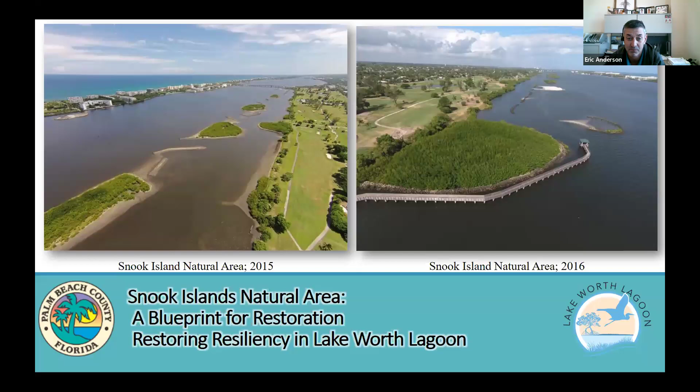Today, Carrie asked me to speak a little bit about Snook Islands. This really wasn't the beginning for Palm Beach County and a restoration story, but it really has provided us the blueprint for the past 20 years of what we learned at Snook Islands. And I'm going to take some of those lessons that we've learned at Snook and share, and hopefully you guys can envision some of these types of projects in your area.

One story that I really want to just start with, and I wish I had more time to talk about, is the Lake Worth Lagoon American oystercatcher. Their story really began in 2005 upon the completion of Snook Islands. The contractor said, "We see these birds with these big yellow or orange beaks hanging around. We're not sure what's happening." They were attempting to nest the very first year Snook Islands was completed.

The project wasn't designed for coastal bird habitat, but these birds showed us that we provided them habitat with the food, shallow habitat, and their story continues through this day. We have 4 nesting pairs of these birds nesting on Lake Worth Lagoon restoration projects. And as I said, they're continuing through this day.

We have an ongoing restoration project. We got about 20 American oystercatchers all hanging out on newly created sand. The project hasn't even completed yet. 13 of those were banded. While most of them were banded in Lake Worth Lagoon, there were 2 birds, one banded from Martin County and another one banded from Brevard County. Just shows you how restoration is so important for all of us.

Not only did they have American oystercatchers, but we had black skimmers. There were about 19 to 20 black skimmers. We had 4 of them with bands, one from an undetermined location in Florida, 2 from North Carolina that were just banded this past summer, and 1 Royal Tern from Virginia banded in 2019. So we're all connected by water, we're all connected by habitat, and it's just so important that we create this habitat.

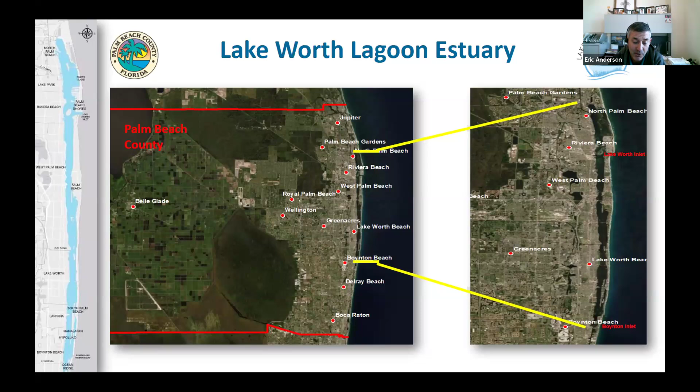The North Inlet of Lake Worth is really our primary focus of where we get most of our oceanic water to create the estuarine system. We do have Lake Okeechobee in our northwest corner. While we do not get a lot of Lake Okeechobee water in Palm Beach County, that mostly goes north to St. Lucie and west to the Caloosahatchee area.

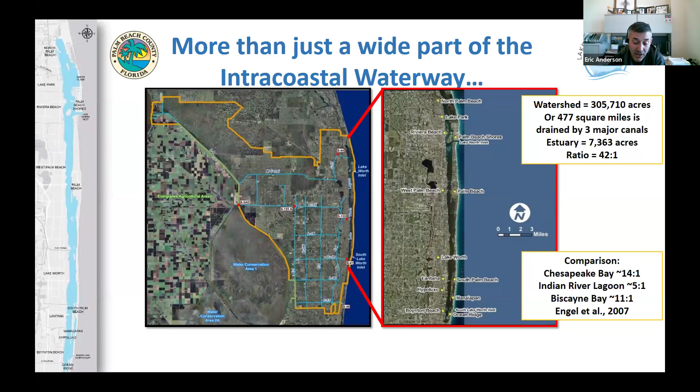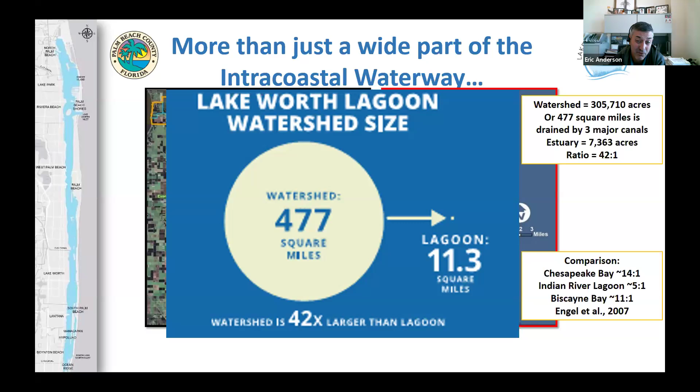We do have a huge watershed, over 477 square miles. As you know, what we do really good in Florida is we move water and drain water. And so while we don't get a lot of Lake Okeechobee water, our own watershed produces quite enough water, or more water than we even need. And if you compare that to other estuaries, Chesapeake Bay only has a 14-to-1, Indian River Lagoon 5-to-1, Biscayne Bay has 11-to-1, Lake Worth Lagoon has a 42-to-1 ratio. So our own watershed is creating some of our own challenges.

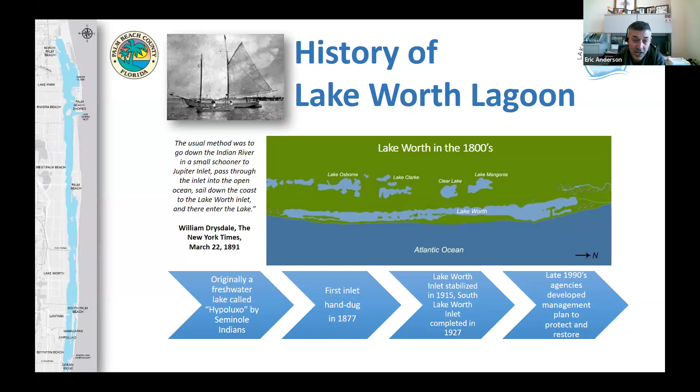It really wasn't until the 1990s, which is only 30 years ago, that the first management plans to protect Lake Worth Lagoon were really in place. So this restoration business is relatively new in protecting our waterways. We've had over 100 years of influences, just like most areas in Florida, whether it's marinas, seawalls being put up, stormwater discharges, freshwater discharges.

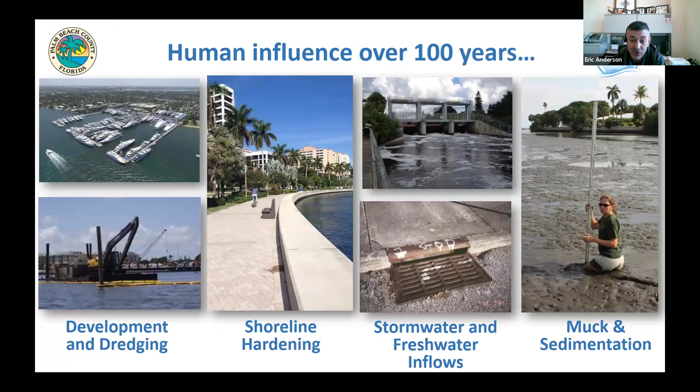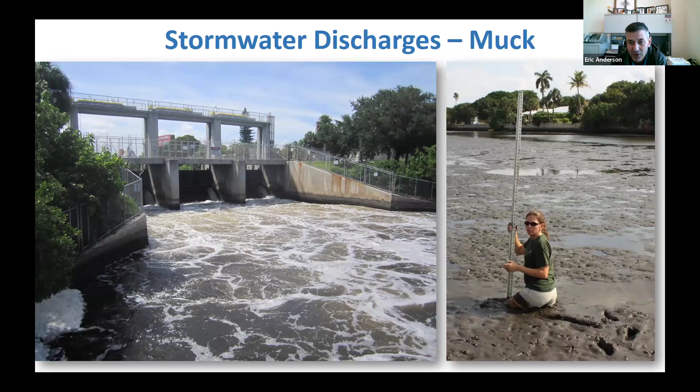So our goal has been to try to find a way to cap these muds, create habitat, and improve habitat. Just one example, all the sediment that comes with the discharges on your left here. This is one location where we did a restoration project and capped that mud. Not every location has muck that's exposed at low tide. A lot of it's in those deep dredge holes. Our area has about 70% that is hardened shoreline. That only leaves 30% natural. So we do have a lot of areas to work.

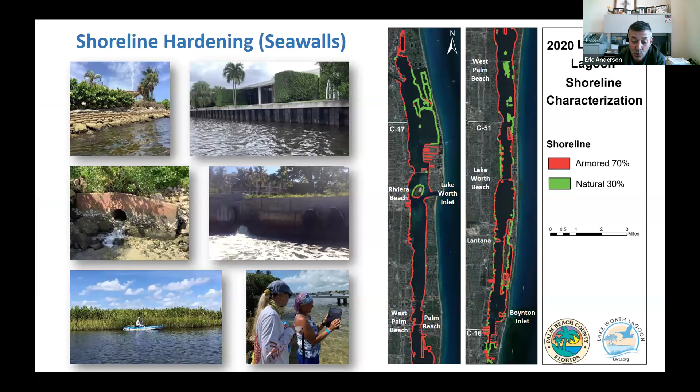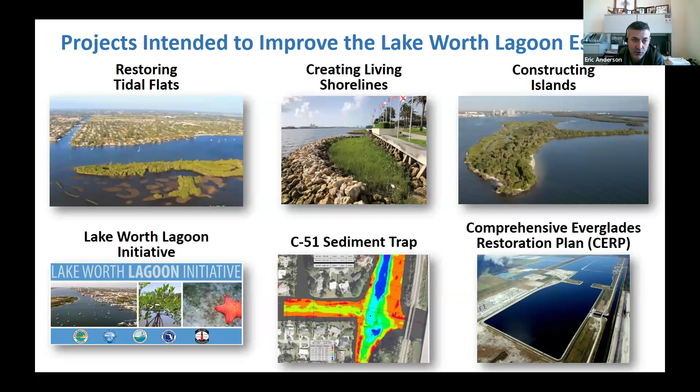We have a series of tools that we utilize. Down on the bottom, we have a Lake Worth Lagoon Initiative that helps get funding, brings partners together, has meetings like you guys are hosting today. In the early 2000s, we did a sediment trap project where we dredged sediment from the C-51 before it got into the lagoon. And while Lake Worth Lagoon has been taken off the CERP Everglades, water storage is always helpful for everybody, whether it's Lake Worth Lagoon or the West Coast or the northern estuaries. Today, I'm going to primarily focus on the restoration tools that we used to create habitat, create living shorelines, and restore islands.

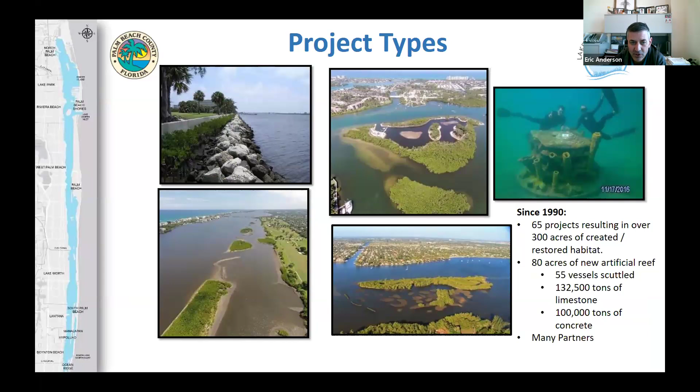The series of tools that we've developed is putting rock in front of seawalls, scraping down islands, an artificial reef program, creating breakwaters and oyster habitat. And what I'm going to focus on primarily is building islands. I always like to start with this slide because you do need to find out your past before you move forward. Palm Beach County's history really started in the 1990s with Munyon Island. We actually reached out to Miami-Dade County. They were doing a lot of these island restoration works. Gary Milano at the time was our inspiration and helped us get into this business.

But it wasn't until we partnered with the Army Corps of Engineers and the state of Florida to construct Munyon Island to create wetlands, removing spoil from this area. This area used to be, in the 40s, a location for the rich and elite to come and drink the pawpaw elixir, which was considered the fountain of youth. While we found some empty bottles, we never drank it. Munyon Island is our fountain of youth, and we realized restoration is an important area for us. Taking those tools, we've done a series of other islands: Munyon, Johns Island, Fullerton, most recently Sawfish, utilizing those same tools, scraping down islands and creating habitat.

Upon completion of Munyon Island, we partnered with the Army Corps of Engineers again to develop Peanut Island not only as a county park, but also as a dredge material management site. The Florida Inland Navigation District and the Army Corps were looking at a place to store additional material. However, they needed to take off the material from Peanut Island, about 1.2 million cubic yards.

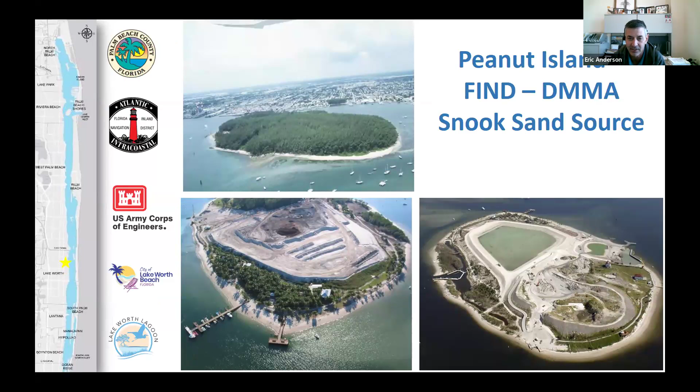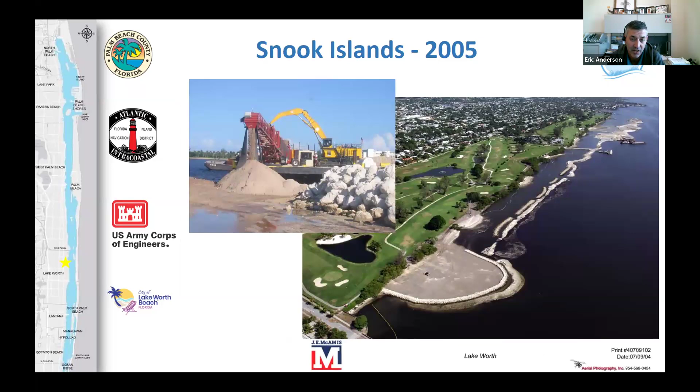Finding a location to take this material, we identified the Lake Worth Golf Course, which is now called Snook Islands. It was an eroding seawall and a deep dredge hole over 20 feet deep with 10 to 15 feet of mud in some areas. The project brought in 1.2 million cubic yards of sand to fill in those muds, cap that mud, and create a true nature-based solution for this shoreline. Rock was implemented to create breakwaters, to reduce wave energy, and to protect the mangroves.

So the tools that we learned from Snook Islands are really a lot of the tools that we've been able to take. And while Snook Islands was almost a 100-acre restoration site, a lot of the lessons learned of breakwaters, of making these mangrove islands, is what we've been able to take on and build the rest of our restoration projects.

One interesting thing about Snook Islands is when we originally constructed, we constructed a lot of areas with open spaces. As you can see now, those open spaces have closed in and mangroves have grown up. So we do have to do some management activities to keep those open spaces open by removing mangroves and vegetation coming in, to allow visitors to actually see what we've created. So top left-hand corner, you can see the failing seawall, bring in sand, plant Spartina, a couple years of Spartina, and now a lot of that Spartina has been outcompeted by mangroves.

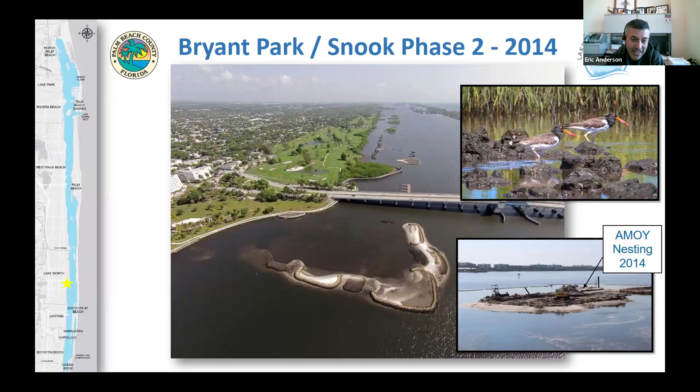In 2014, we partnered with Florida Inland Navigation District and the state of Florida's DOT to construct seagrass mitigation for building bridges. And this was the second phase of Snook Islands, building smaller mangrove islands and oyster reefs. This was the first project where, while we were bringing sand, our second pair of American oystercatchers nested on the sand during construction. And so it made us start thinking, it can't just be about oysters. It can't just be about mangroves. We need to consider the birds.

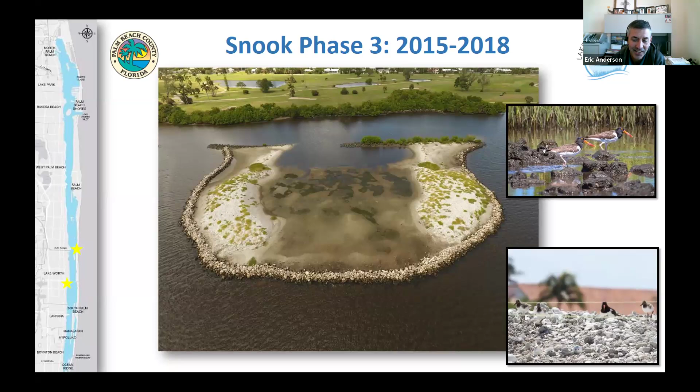The third phase of Snook Islands included receiving materials of opportunity, beneficial reuse from local marine projects, dredging projects. And we created 2 nesting bird mounds and a mangrove island in between. This was our third pair of birds nesting in Lake Worth Lagoon as a result of this. We were hoping that the 2 mounds would allow 2 different pairs to nest. Unfortunately, these birds are solitary nesters and they've taken up the whole island.

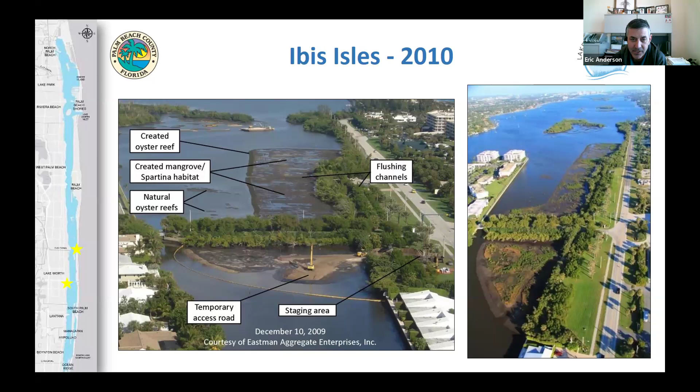Ibis Isles is a location where, remember the girl was in the mud earlier. This was shallow water mucky habitat that we wanted to cap, and we did cap to create mangrove, Spartina, and oyster habitat. South Cove in 2012, filling in a deep dredge hole. Grassy Flats, utilizing the same technology that we used at Ibis, we used a sand shooter, which broadcasted sand over shallow water mucky conditions to create about 12 acres of seagrass habitat and 2 acres of mangrove. And this was our first project that was specifically designed for American oystercatchers to nest.

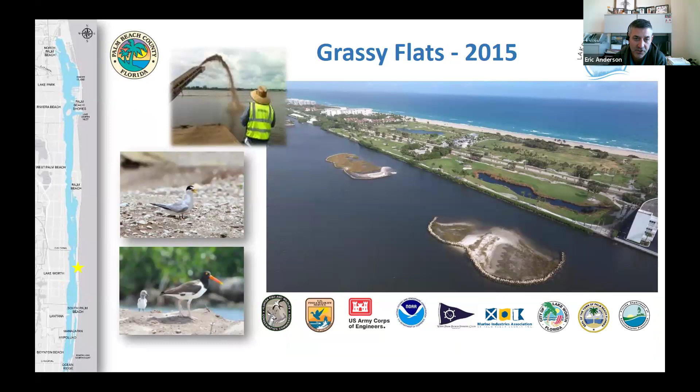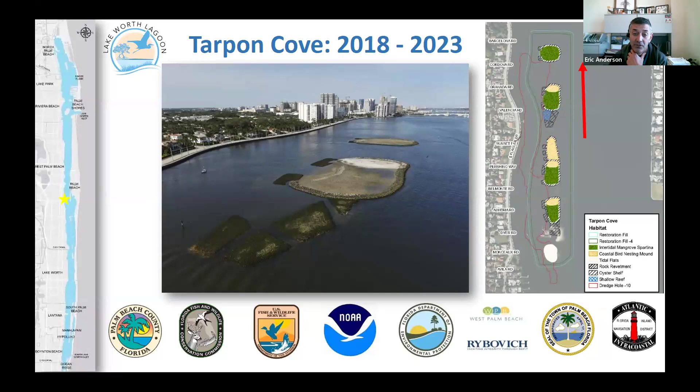Most recently, we just completed Tarpon Cove in downtown West Palm Beach. This project required over 500,000 cubic yards of material. Of that, 369,000 was beneficial reuse at no cost to the county. Not only did American oystercatchers nest on this island during construction, we also had 3 years of black skimmers nesting and 2 years of least terns nesting.

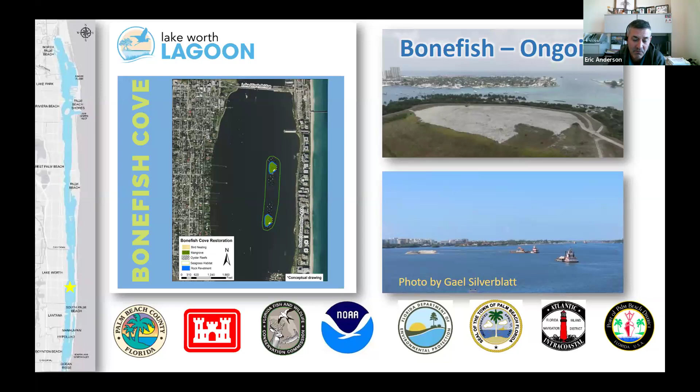I know we're getting close to time here, so I'm just going to run through a couple of the last projects. Our most recent project is Bonefish. I showed you earlier with all those birds utilizing it, similar to Snook Islands and similar to Tarpon, filling in a deep dredge hole to create intertidal habitat.

One lesson that I do want to share, though, is some of these dredge projects do require lots of material. And material can be the challenge for these projects. You need to have a sand source, and the county's done that either through partnering with Florida Inland Navigation District or local marinas. If you can find shallow water locations that do not have resources, those are also bang for your buck.

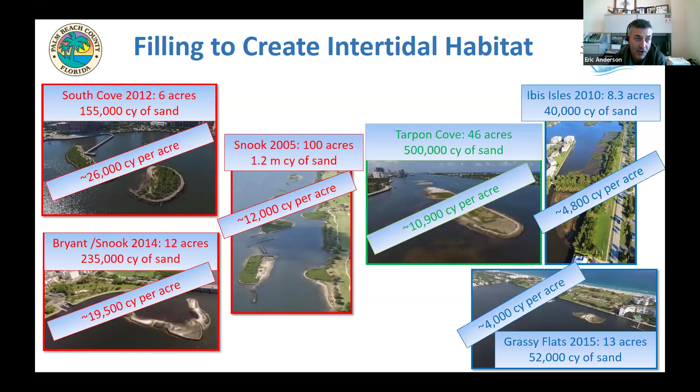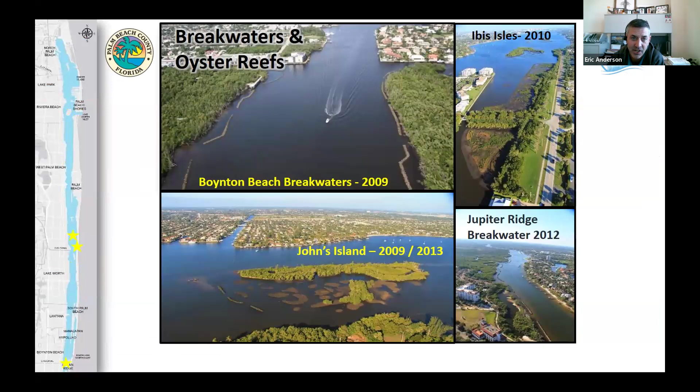So some of the tools that we've used in the toolbox is breakwaters, and I know Thomas and Jenna both talked about these. We have those at Peanut Island. John's Island rock has been great for oyster habitat for us. Breakwaters in front of existing mangroves that have heavy wave energy, Jupiter Ridge and Boynton Beach. John's Island is one of the reasons why we've had such successful American oystercatchers utilizing it. The rock that we've put out there has created amazing oyster habitat.

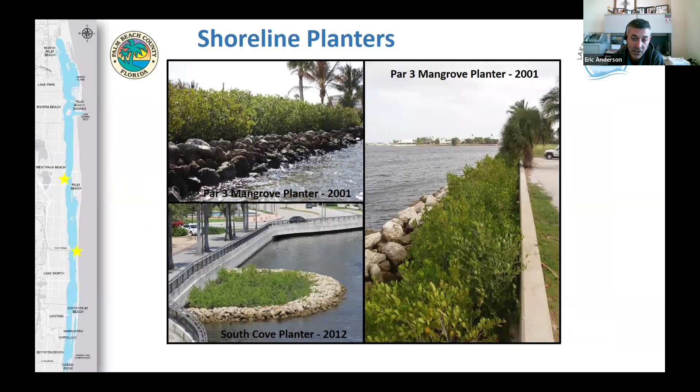Highland Beach and Old Bridge Park, again, just breakwaters in front of existing areas. Our shoreline planters, putting rock in front of a seawall. Par 3 golf course has not had to have a seawall replaced in 20 years as a result of just adding mangroves and rock. Over the years, we've dabbled with concrete culverts at Lantana. We've dabbled with artistic prefab structures at Bryant Park. And then just our more typical rock riprap.

And all of our projects we plant with Spartina and mangroves. You can see the Spartina lasts for the first couple years, and then eventually the mangroves will outcompete the Spartina to create a green-gray living shoreline.

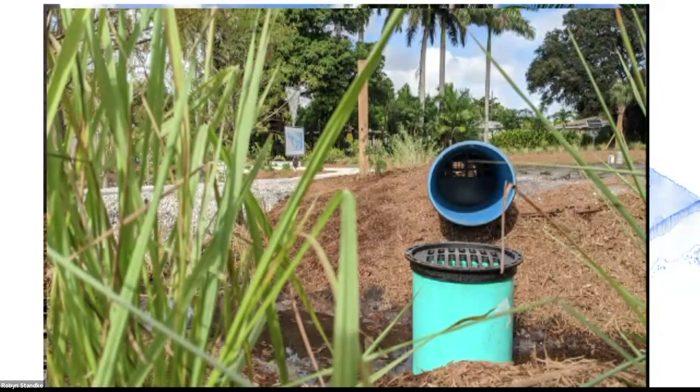The intent of the design, as I said, was to make the invisible visible. So you'll see that this big blue pipe that's normally stuck underground, we wanted it visible. We wanted to utilize a low-tech, solar-driven, above-ground pumping system. And you can see that here, so that when the water rises to the top of that conveyance, that pump device that you see right here, it will automatically pump when this bioswale is full. It will automatically pump it up through the stormwater pipe down into the pond. Next slide, please.

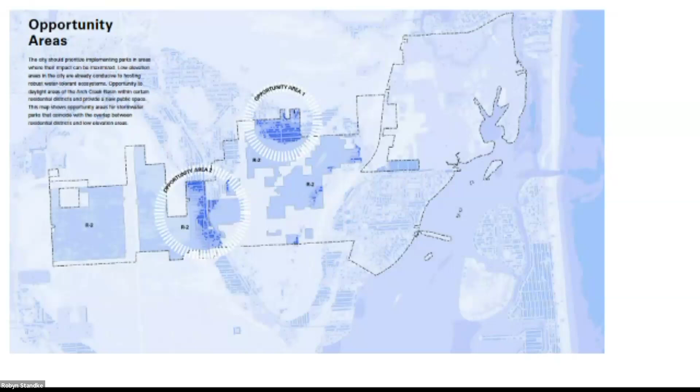So expanding this network of open spaces, we wanted the parks to both increase the, how do I say it, the absorbency, have more native trees and plants back in the urban areas and protect our groundwater. The third thing that we wanted to do was raise environmental awareness and promote community engagement. And the final thing about these stormwater parks we want to share with other jurisdictions and agencies is that it's really easy to do. These are very, very simple.

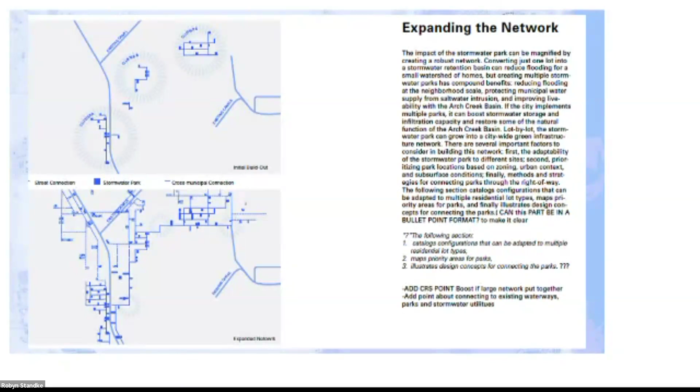It required being first out of the gate, and unfortunately first out of the gate oftentimes means that you are struggling and trying to get people to recognize the importance of this. The other thing I wanted to share with you is it's really important to have that education component and to deal with engineers in the public works who want to do a typical retention pond. Next slide, please. I'm almost finished here. As you can see, the plan has various types of network and lot typologies. Go ahead, next slide.

So the funding sources, remember I told you we definitely have budget issues. So we had the primary grant. We got a grant from FDEP. Thank you again for that. Nature Conservancy donated a lot of our plants. We had private donations, and the county actually waived its planning review fee. Next slide.

We really are excited to share this project with others. We've had other agencies and jurisdictions tour the park to learn how it works and the easy replicability and scalability of this type of community green infrastructure. And we did receive an APA award of excellence in sustainability. Next slide. I'm going to give you just a couple of takeaways.

First out of the gate is innovative ideas are hard to move forward. It can be frustrating, but don't give up. Remember, I said education. Have not just a staff champion your projects, but also the decision maker. Get your city manager, council members. Do a really robust community engagement. Don't forget to bring in the external agencies and be creative with your funding sources.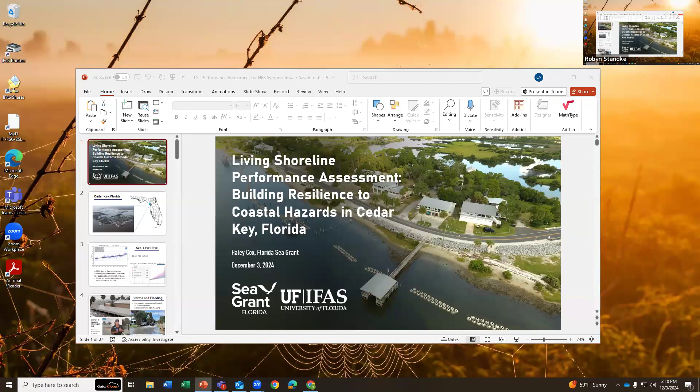Oh, hold on just a second. Are you able to share your? Oh, there we go. Let's see. We might need to switch to. Let me switch the screen around. Honestly, if people can see your notes, it's not the worst thing in the world. All right. This is my battle station. I have like 3 monitors and I never know where we're going. Perfect. Okay, we can see your slides now.

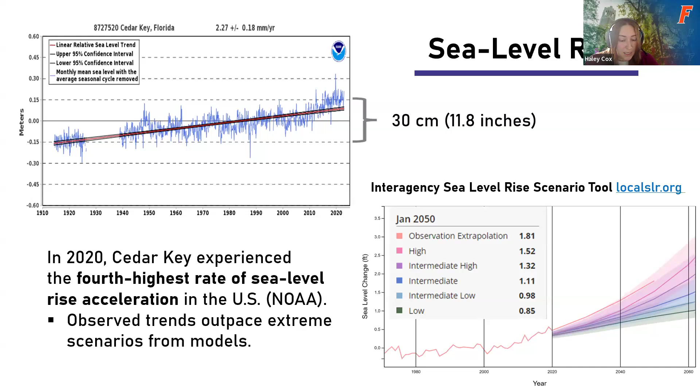According to NOAA tide gauges, Cedar Key is experiencing one of the highest rates of sea level rise acceleration in the country. Sea level in Cedar Key has risen about a foot in the last century, but over half of that rise has occurred just in the last 20 years. Extrapolation of these observed trends outpaces even the most extreme modeled predictions for future sea level rise. Coupled with changing rainfall patterns, this leaves a community really vulnerable to the effects of compound flooding, especially when rainfall events coincide with daily high tides.

Since Idalia, we've had 2 more hurricanes landfall in the Big Bend. We had Debby in August of 2024 and Helene just at the end of September. During Helene, Cedar Key experienced a surge of over 10 feet, and the community is very much still recovering from what was a really devastating impact.

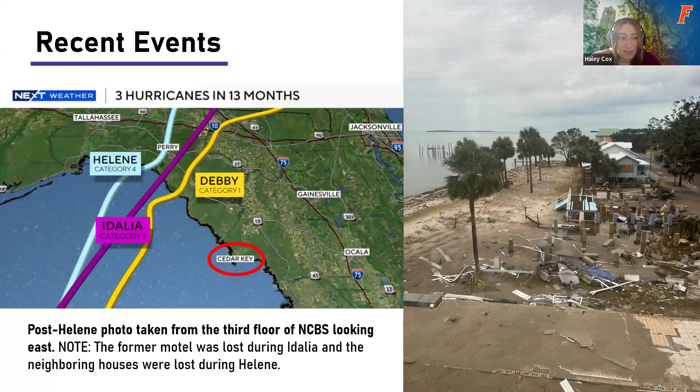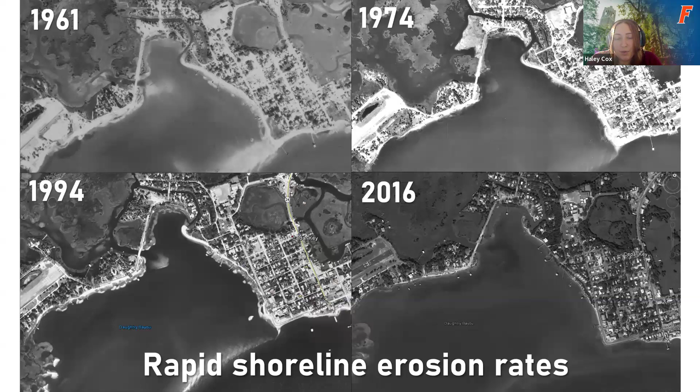So this compound threat of sea level rise, coastal flooding, and then these storm impacts, it also contributes to the rapid shoreline retreat that we've observed in Cedar Key over the last 50 to 60 years. And this is an area called Daughtry Bayou. These aerial images document this really noticeable shift from sandy beaches with vegetated dunes to skinny shorelines that now abut road infrastructure and residential property.

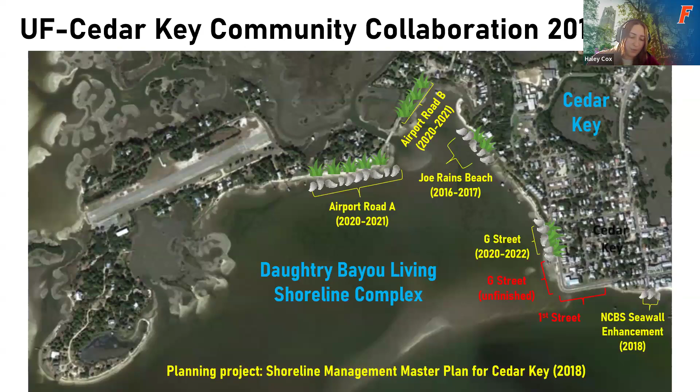And shoreline management practices in Daughtry Bayou and elsewhere in Cedar Key now utilize nature-based solutions in the form of living shoreline construction. So I don't need to extol the benefits of living shorelines, but they do provide a variety of ecosystem services. And I'm going to be focusing on 2 of the benefits that have been the most impactful in Cedar Key. And the projects that I'll be referencing were designed with the goal of reducing incoming wave energy and erosion in order to protect existing infrastructure, such as major roadways.

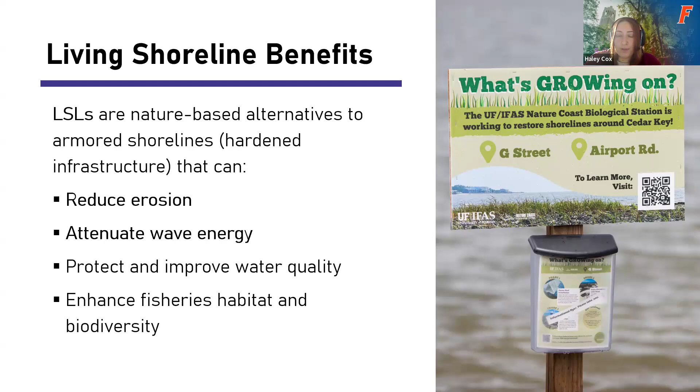So all of these projects that I'll mention, they're essentially retrofit designs that were installed along shorelines that had some form of existing armoring. The funding sources for the Daughtry Bayou Living Shoreline projects include federal and state funds from the US EPA, FDEP, as well as FWC. So I'm going to move us through this section quickly so that we can really talk hurricane impacts, but I would be happy to provide additional resources that go into more detail about the design and construction of these projects.

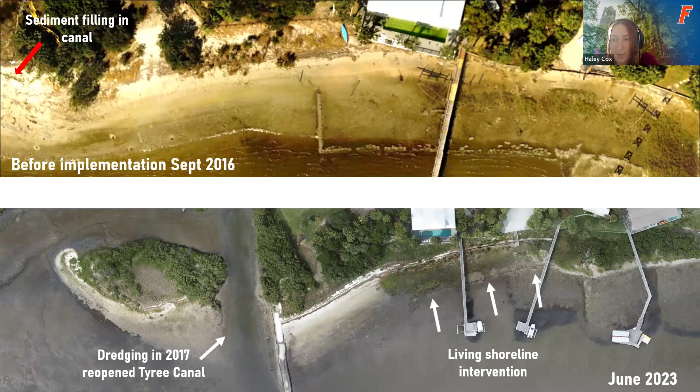Since implementation, the previously failing bulkhead that is in front of the homes pictured here, it has remained intact throughout numerous storm impacts over the years, and the vegetation had plenty of time to establish. It hasn't been significantly impacted either. We have seen a bit of a shift in the community composition, though, as mangroves have started to naturally recruit along the shoreline.

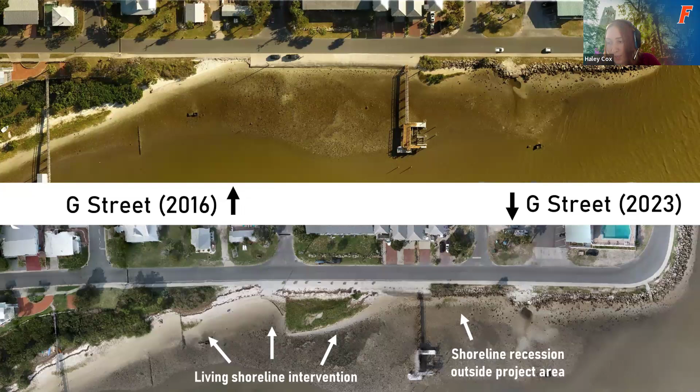So speaking of green, prior to Hurricane Idalia, the extent of the vegetation cover at the Airport Road and G Street shorelines had been increasing since implementation. However, coverage has decreased a bit after these repeated storm impacts, primarily in the higher elevation zones at Airport Road.

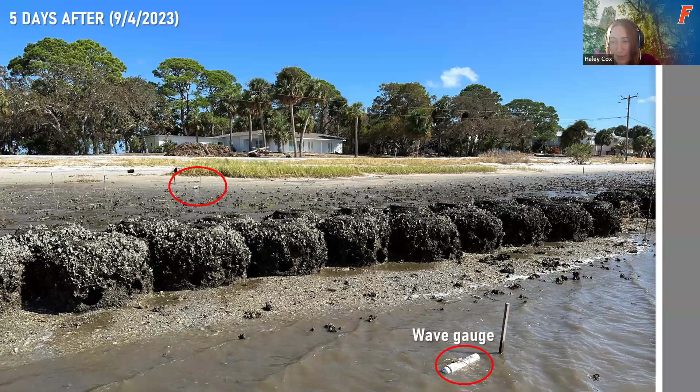So on to the good stuff, wave attenuation. Ahead of Hurricane Idalia, Mark Clark in the Soil, Water, and Ecosystem Sciences Department at UF was able to deploy 23 wave gauges along Airport Road and G Street. The deployment sites also included areas outside the project zone, so we would have a hardened reference point available to us. In this picture, you get a better idea of the placement, and you can see what the exposed reef balls look like at low tide. So we have an inshore gauge and an offshore gauge that was placed outside of the influence of any of the breakwaters.

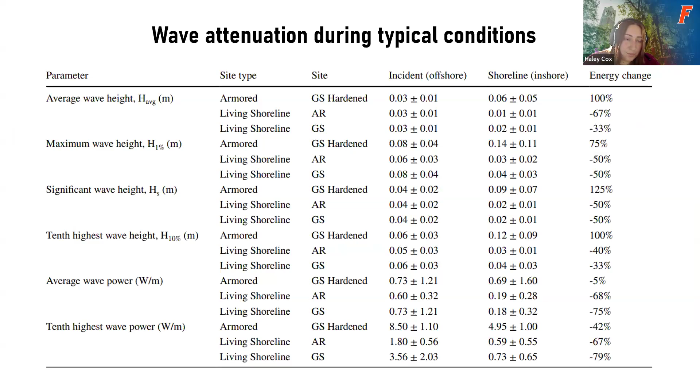This table shows the incident and shoreline wave climate and attenuation during conditions leading up to Hurricane Idalia as recorded by those offshore and inshore gauges. During typical conditions, wave energy reduction in the living shoreline zones ranged from about 33 to 79%. Then this table shows values recorded during the storm, and the living shorelines reduced wave energy by up to 28% in certain areas along G Street.

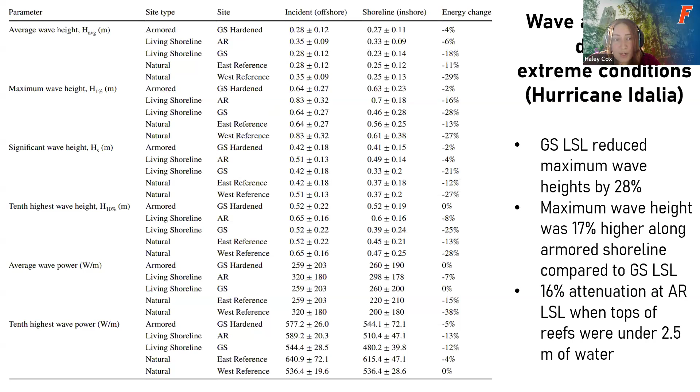There are a few other things to note that aren't captured in this table, but the maximum wave height along the armored shoreline was 17% higher compared to the G Street living shoreline. We also see some interesting data here with wave attenuation expressed as the percentage reduction in incoming wave energy, measured across different water depths.

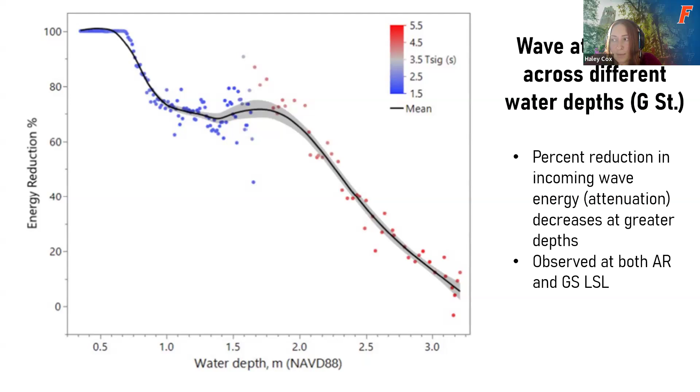The black line represents the mean energy reduction values. The gray shading is the confidence of fit. And the color of the points represents the average significant wave period. So those warmer colors are longer wave periods. These are taller waves, the water's deeper. So the percent reduction in incoming wave energy does decrease at greater depths. Go figure.

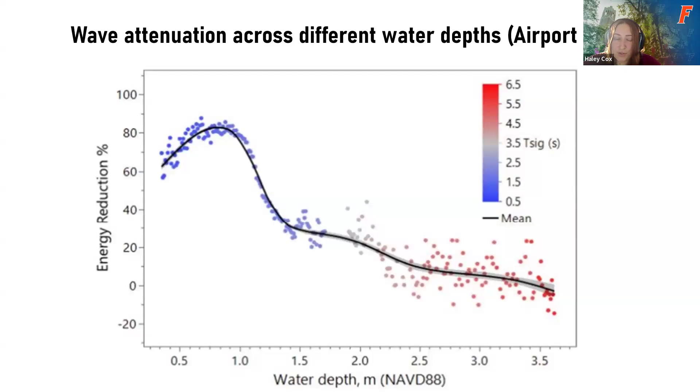But something that's interesting, this is along Airport Road, we did notice that wave energy was still being reduced by up to 16%, even when the tops of those reef structures were under about 2.5 meters of water, which was surprising to see.

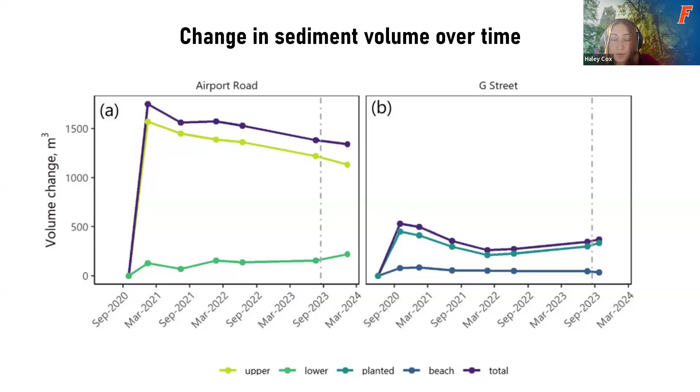So examining only the lower intertidal zones, the volume change trends were positive or at least stable at all sites, indicating that erosion has been halted and accretion may even be occurring in some cases.

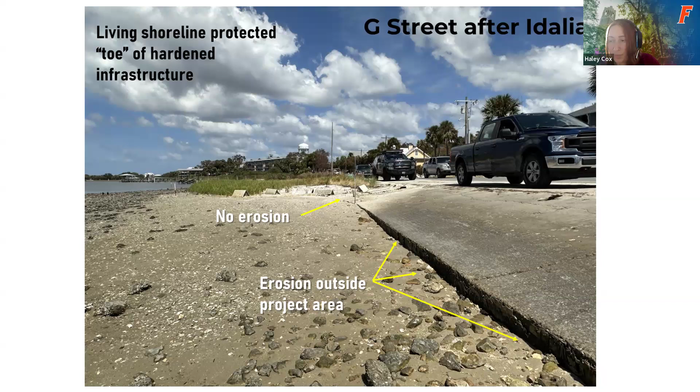I think this picture tells an interesting story and also highlights how these shorelines are protecting hardened infrastructure behind them, which is particularly vulnerable at the toe or the base of something like this concrete apron. This is that same section of G Street after Hurricane Idalia, and we're still noticing the same phenomenon where the area outside the project footprint is still experiencing the effects of ongoing erosion.

So overall, I think we've had great success building ties to the Cedar Key community. And these projects have really opened the door for discussions about nature-based solutions, even different types of nature-based solutions. We're working on some projects that are more focused on stormwater now. So great to see that.

All of the shorelines have weathered multiple storms now with minimal losses of sediment and vegetation, and they have successfully sheltered the infrastructure behind them, which was the goal. So we came away with some of this data that suggests that these types of shoreline interventions do provide some level of protection during extreme events, in addition to typical conditions, which again, love to see that.

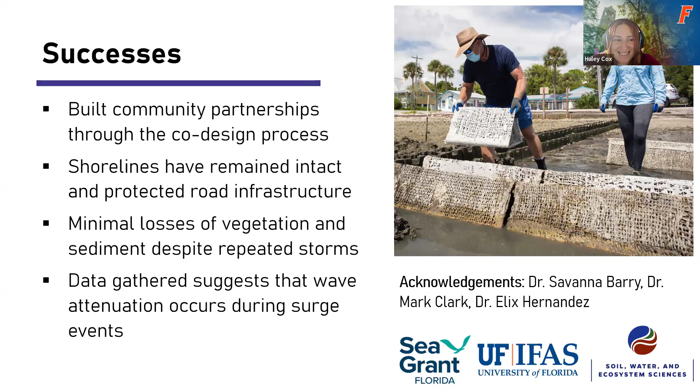So we also need to do our best to manage expectations. I can't claim that a living shoreline is going to stop storm surge or somehow prevent flooding during an event as extreme as Hurricane Helene. But these projects were never designed to do that. So we're still in the process of reviewing some of the wave attenuation data from Hurricane Helene, but I can say that the attenuation values that I've seen so far are less, which is to be expected. It was a much more extreme event.

And in addition to these more recent events, a few tropical storms that occurred immediately after planting did contribute to the loss of elevation and vegetation, especially in the high marsh along Airport Road. So it does make that establishment period a bit more difficult, and subsequently, projects can struggle after the fact.

But another thing to note, if you are a living shoreline purist, you may not even consider these projects up to snuff, because they are going to struggle to adapt to sea level rise because of that coastal habitat squeeze, where they're installed directly in front of road infrastructure. They can't migrate inland. But the Cedar Key community, they've been really on it as far as what they want out of these projects, and it is understood that this is kind of just buying time for them to make other adjustments that will be needed in the future.

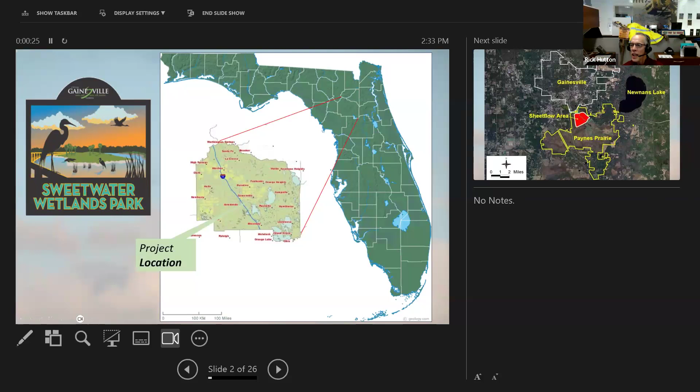So I'm going to talk to you about our Sweetwater Wetlands Park, and I'm going to present half of it, and Chris is going to present some more of the details. I'm going to give you a little bit of background. So our project is located in north central Florida in Alachua County, just south of Gainesville. And I'm going to zoom in a little closer to the project area.

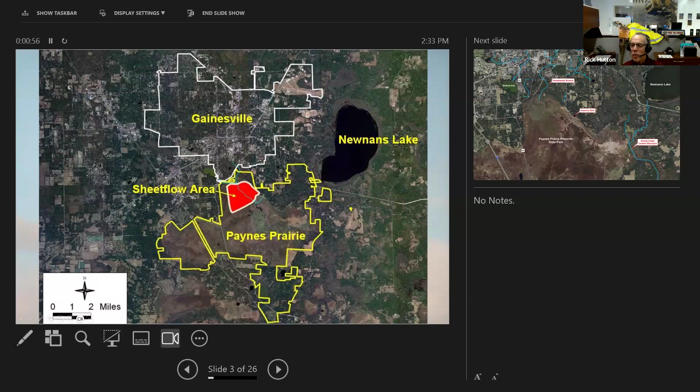So I don't know if you all are familiar with Paynes Prairie Preserve State Park. It is a 21,000 acre state park. It is essentially a wet prairie. It's located directly south of the city of Gainesville, and our project area is primarily located in the northern lobe of Paynes Prairie, more or less where the state park meets the urban Gainesville area.

So this aerial photo was taken prior to our project, and I want to give you a little bit of background. So Sweetwater Branch is a creek that flows through what is now urban Gainesville. Most of it was developed prior to the 1980s, so older development. In its natural state, it flowed out onto the prairie in more or less a sheet flow type pattern, which provided an important water source for the prairie.

Again, in this sort of natural state, the prairie actually receives flow from a number of different sources. It is a wet prairie, but the hydrology can vary very significantly depending on the weather patterns. The prairie is connected to the Floridan aquifer via a sinkhole that is located at Alachua Sink. So at Alachua Sink, there's a 4-acre lake there that overflows into a sinkhole, and depending on the levels in the Floridan aquifer and how much rainfall we're getting, sometimes the prairie can be very dry, which in this photo it looks pretty dry. Other times it can be almost a lake.

So a number of things have happened over the years compared to its natural state. One is, and you can kind of see this in this photo, that ranchers that used to own the land dug ditches throughout the prairie, and one of them connected Sweetwater Branch directly to Alachua Sink. The purpose of that ditch was to drain the prairie to make it more suitable for cattle ranching. And you can see some other ditches elsewhere in the prairie. One of the objectives of the Park Service, who manages the state park, is to try to eliminate as many of those ditches as they can.

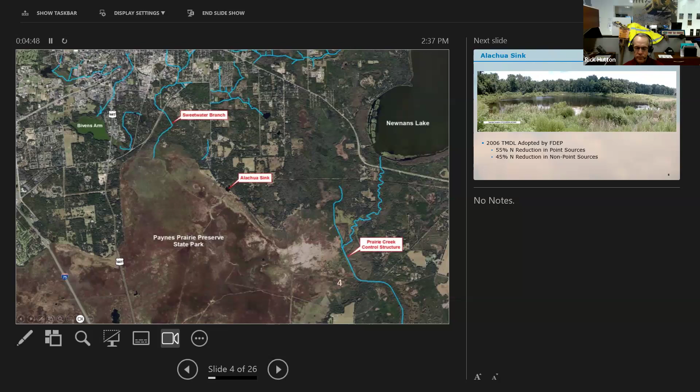Additionally, at Gainesville Regional Utilities, we operate a water reclamation facility that discharges directly into Sweetwater Branch. And although that plant has been upgraded and is in the process of getting upgraded again now, it was still a pretty substantial source of nutrients coming into Sweetwater Branch, with all those nutrients flowing into Alachua Sink. So I mentioned multiple issues. One is the nutrients, also the sediment depositing from stormwater and trash from stormwater. And then also the fact that this area was being starved of its natural hydrology. So that gives you a little background.

So in 2006, Alachua Sink, and here's a close-up of that 4-acre lake I was talking about, was listed by the state as an impaired water. So some of the lingo I'll throw at you: there was a total maximum daily load, a TMDL, set for that water body, which in essence required all of the sources of nitrogen to be reduced. It required point sources such as our Main Street plant to reduce nitrogen by 55%, and also required a 45% reduction in non-point sources. So a pretty substantial reduction required.

So through this process that the DEP runs, which they call the BMAP, Basin Management Action Plan process, we all looked at how do we meet the regulatory requirements, these reductions, and ultimately came up with a comprehensive solution that not only solves the problem for GRU and our water reclamation facility, but also solves it for stormwater that is the responsibility of the city as well as the county and DOT and whatnot. And so here's what that solution looked like, and Chris is going to give you a little more detail on what it actually looks like, but this is kind of the concept.

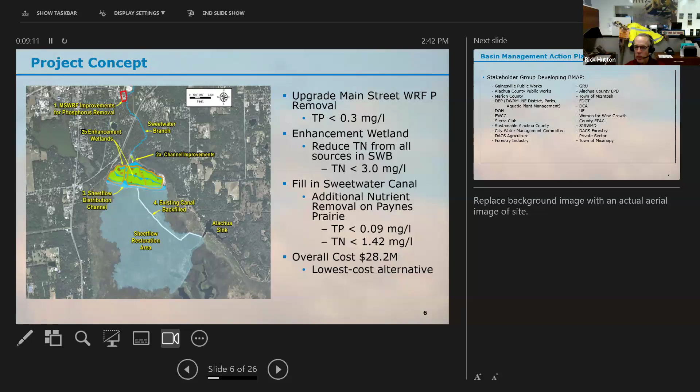So I'll just acknowledge this Basin Management Action Plan program that DEP runs when a water body is impaired. They go through this BMAP process, they call it. We really brought together a whole bunch of stakeholders, including government agencies, citizen groups, environmental groups, community leaders and whatnot. And so it was a really big group. But the advantage of that is, although you have these really big meetings with a lot of people, it really enabled us to come up with a comprehensive approach and get buy-in and input from everybody. So I would say this is sort of a flagship of success of that program.

And I mentioned the project was $28 million total cost. We did get some funding from a number of different partners, including DEP, St. Johns River Water Management District, DOT, Florida Wildlife Commission, and Alachua County. So they covered about $6 million of that $28 million in cost, which is really helpful. And this was constructed during the recession, so not during modern times, when there has been a lot of money available. At that time, it was really hard to get funding, but despite that, we were able to get a fair amount.

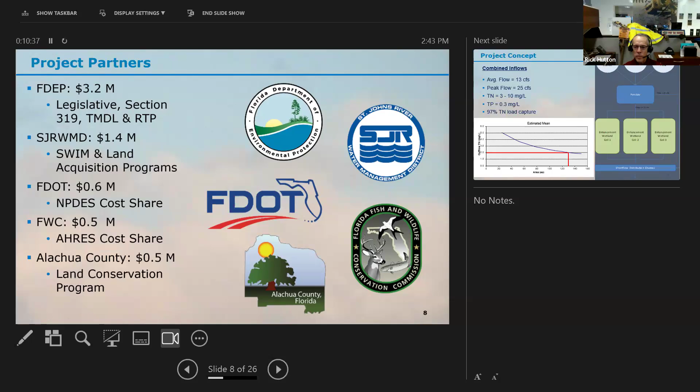So I am going to transition over to Chris and let him talk a little bit more of the details. Chris? Yep, I'm here. So this slide is really showing schematically the project.

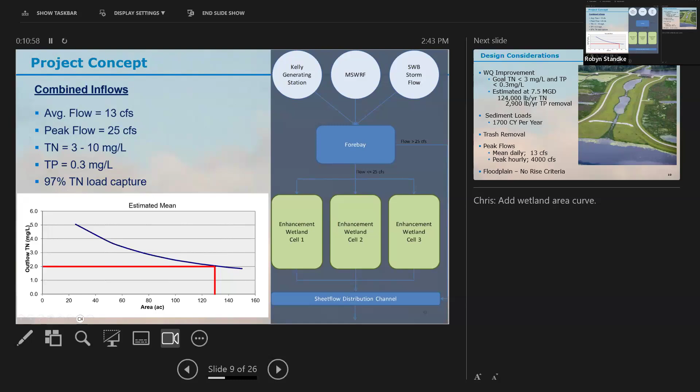Uh-oh, Chris, are you able? I don't hear you. Hello? Walt's not here, by the way. Are you guys still able to hear me? Yep. Hi, Rick. We can hear you. Can somebody in the online audience besides Rick let us know if they can hear Chris? Chris, can you? Testing.

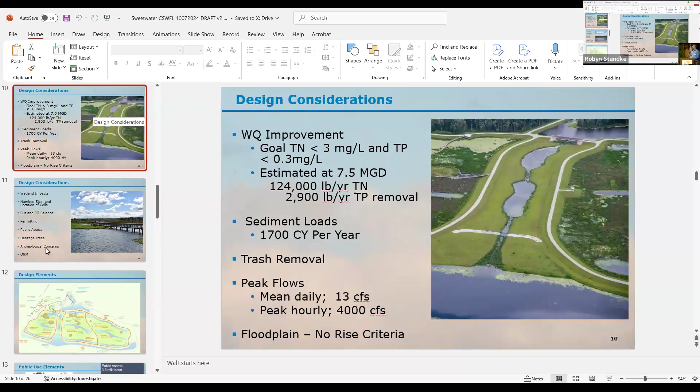So the main focus being water quality improvement. We're really driven by that goal to reduce the total nitrogen coming out of the enhancement cells onto the prairie to less than 3 milligrams per liter. And when estimated, looking at the capacity of the Main Street facility at that time, which was 7.5 million gallons per day, that required a reduction of about 124,000 pounds of nitrogen per year. And you see just under 3,000 pounds of phosphorus removal there as well.

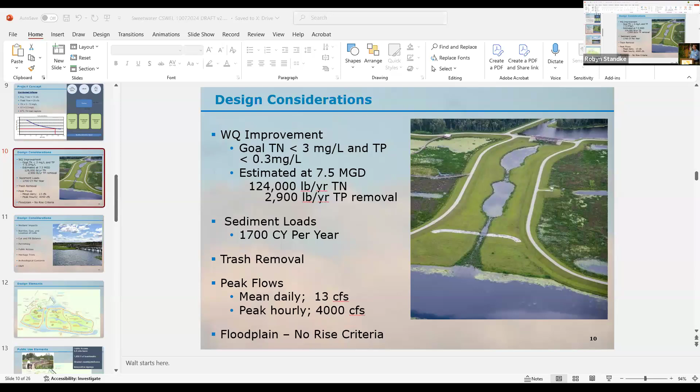We've seen everything come downstream, from beach balls to Gatorade bottles to propane tanks to shopping carts to a television and who knows what else. But everything that you can imagine as you drive around town in urban environments and you see cast on the side of the roads hits the stream and comes to the project. So that was a big concern.

I mentioned earlier on the previous slide that the average daily flow into the system was about 13 cubic feet per second. That's in dry weather days, entirely driven by the discharge from the Main Street Water Reclamation Facility. But when it rains, it being a very urban, super developed system, those peak hourly flows shoot up over 4,000 cubic feet per second. And to make it even more fun for the floodplain people in the room, the project had to fit in a hydraulic profile that caused no upstream increase in stage.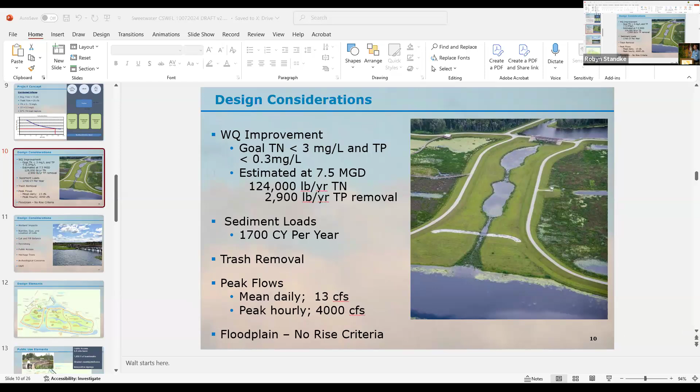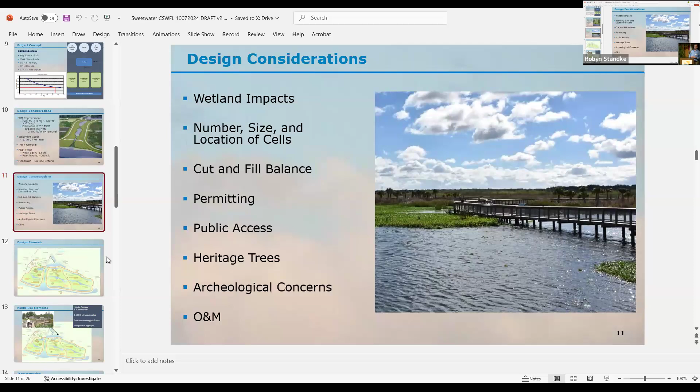There was a big drive from the very beginning and a lot of community stakeholder involvement to really make this publicly accessible. So we'll talk about that in a moment. At the county level, we had to deal with heritage trees around the rim of the prairie. We had cultural resources to deal with, and everything had to be left in a condition that was relatively easy to operate and maintain by the city public works staff. Next slide.

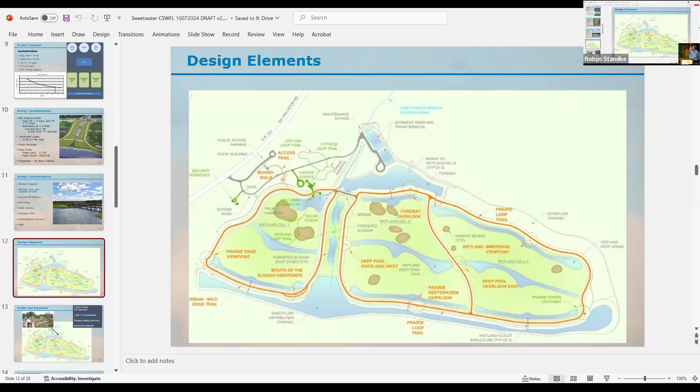So I mentioned public access. Everything in orange here on top is the top of bank surface, and those are all maintenance access for the rangers to get around, but they're also public use trails. So they're covered with crushed gravel. You can walk as little or as far as you want. The public use features are prioritized in cell 1, which is the one on the west, on the left-hand side there, so that it is a shorter trip for people coming off the parking lot. But if you're feeling ambitious, you can do the entire loop and walk several miles out there. There's also shaded viewing platforms and interpretive signage throughout the project site. Next slide. Time to really speed up.

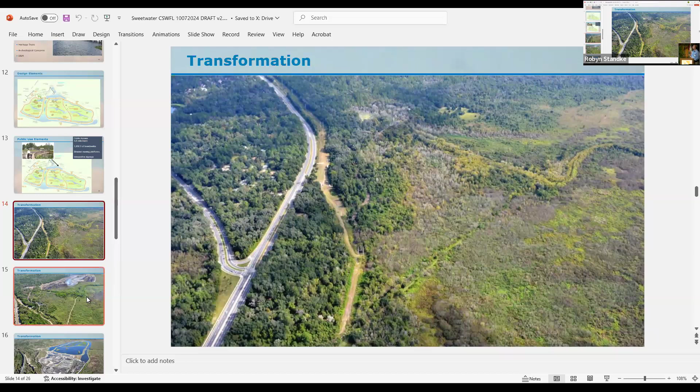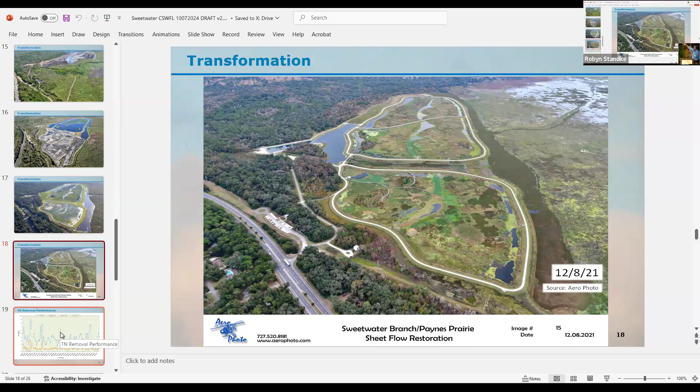Final project, about 6 years after completion of construction. Everything's grown in. You can see the different plant communities, and all those white gravel surfaces there are the extent of the public use trails. Next slide.

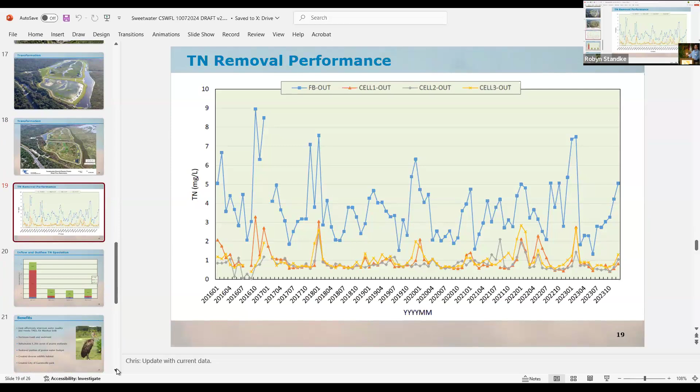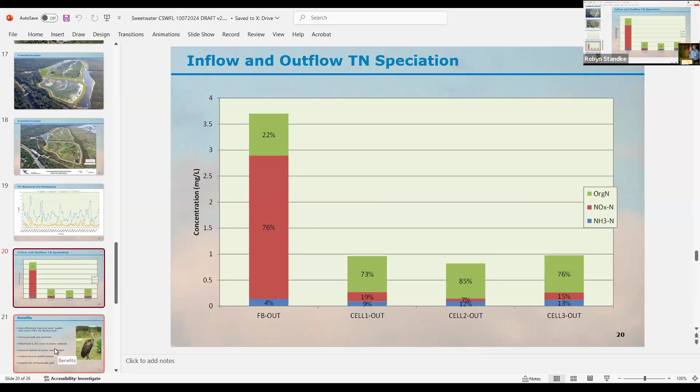Not uncommon in wetland projects: a very nitrate dominated inflow, which is driven by the discharge from the Main Street Water Reclamation Facility. Nitrate is really easily removed in natural treatment systems, particularly in wetlands. You see how the composition changes there. The total nitrogen's again less than 1 milligram per liter coming through the system. Next slide.

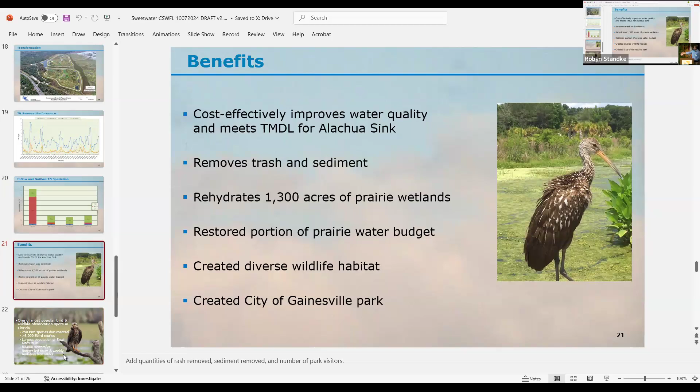Benefits. Cost effectively improves water quality and meets the TMDL. We're killing it on meeting the TMDL. Rick mentioned $28 million versus 80 million plus just to deal with the wastewater side of the issue. Removes trash and sediment, rehydrates the prairie, all these other public access amenities. Next slide.

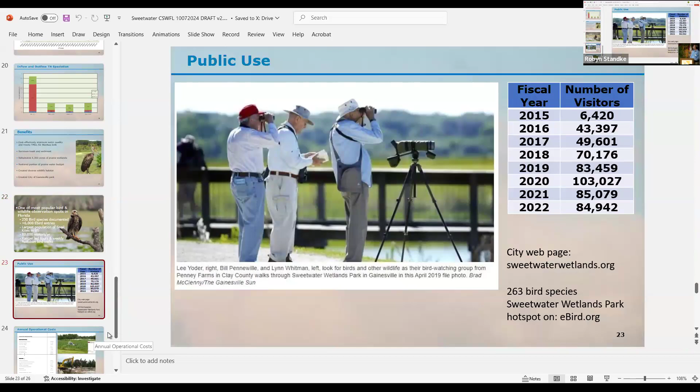Visitation numbers. You see the COVID boom there in 2020 when everybody's trying to get outside, but averaging better than 80,000 people a year. Next slide.

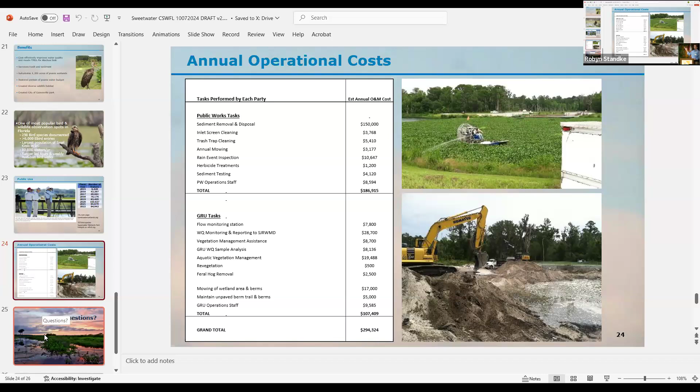There's a certain level of monitoring costs associated with water quality and flows and hydrology, and then some other ancillary activities with mowing, sediment removal, trash collection, and such. So I'll end it there since you told me to wrap up 2 minutes ago.